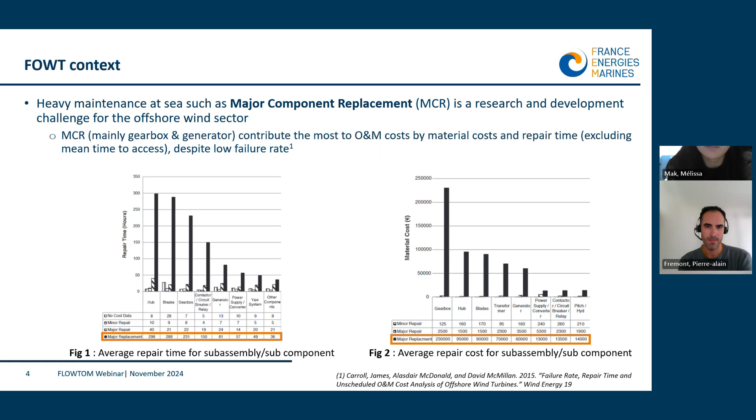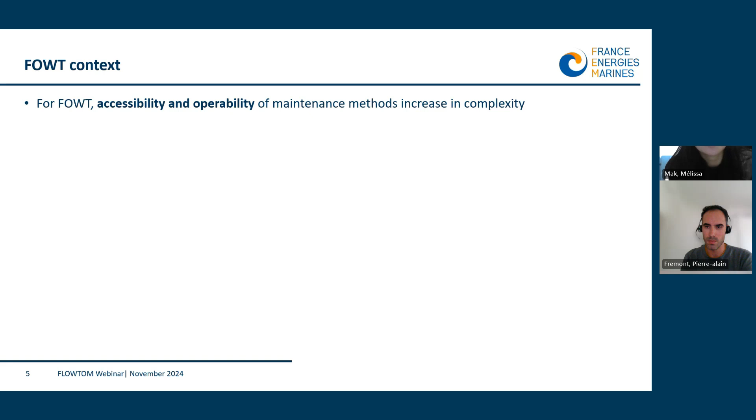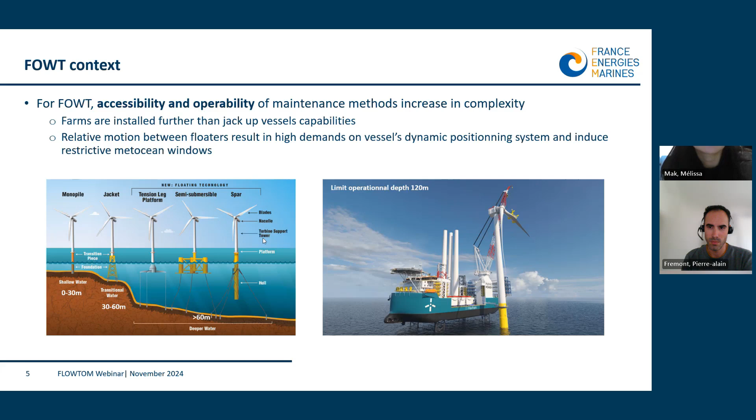And especially in the floating offshore wind sector, accessibility and operability of maintenance methods increase in complexity. First of all, because the farms are installed further than the jackup vessel capabilities, but also because relative motion between floaters results in high demand on vessel dynamic positioning system and induces restrictive metocean windows. So in this context, the sector expressed a need to have reliable and proven solutions for MCR operation of floating offshore wind turbines that are cost competitive with tow-to-port alternatives.

So as you can see on this floating wind JIP phase 3 summary report graph, there are the HLM technologies, among which we have turbine mounted cranes and vessel mounted cranes technology. So there are some technologies that are cost competitive to tow-to-port technology, but as we can also see, they are more sensitive to sea state conditions.

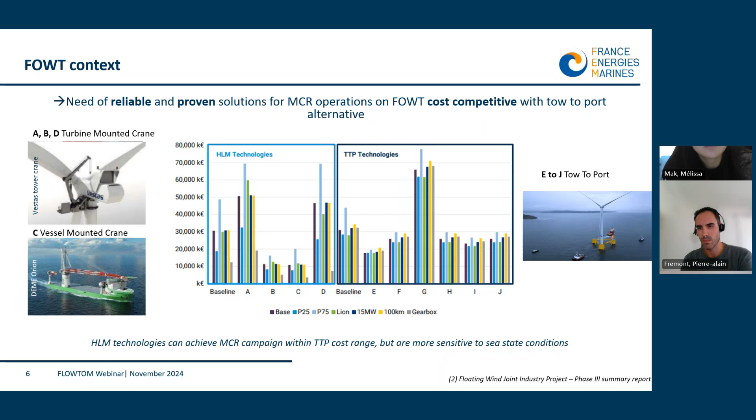So in this context, the FLOWTOM project objective that was carried between 2021 and 2024 is the following. So we challenge floating offshore wind turbine LCOE reduction by improving MCR operation accessibility in different sea state conditions by the development and the assessment of methodology and simulation tools for MCR solution operability evaluation. So you will see in this presentation that through a numerical model that was validated by basin tests, and in which we input operating limits and environmental conditions, we can outcome with time domain computation. We can reach allowable sea states, % of operability, and the favorable period of year for MCR operations.

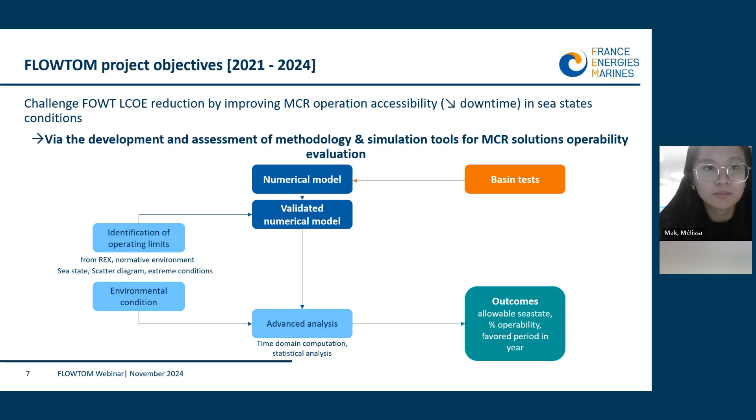So in the following study, we decided to study one MCR solution, which is self-erecting turbine mounted crane. So this solution is advocating improved EHS because there are no relative movements between the floating bodies. It also advocates higher availability, so lower downtime, and it advocates resistance to harsh environment. So in our case study, we describe our MCR solution, which is inspired by the real MCR solution, but it's not the exact real one, because our objective is to crash test the methodology and is not to assess the full system operability.

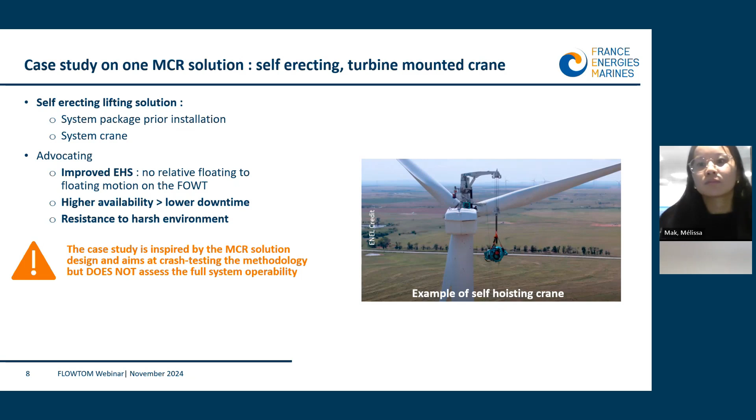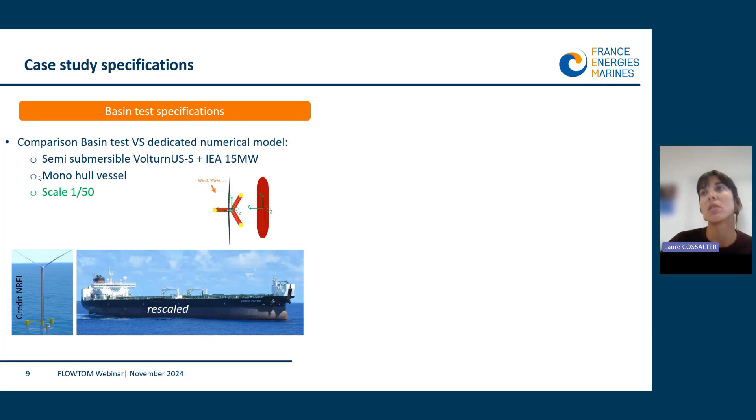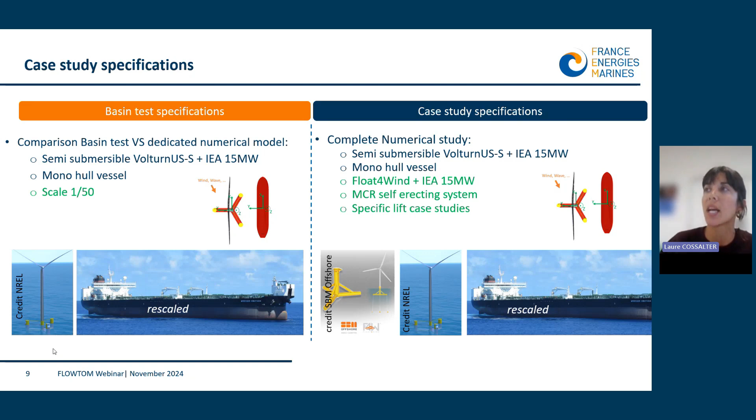So in the rest of the case study specification, for the basin tests, we are studying also a semi-submersible floater, which is the VolturnUS, equipped with a 15 megawatt turbine designed by IEA, and a rescaled monohull vessel, both scaled at 1:50. And for the numerical study, above the two other bodies described, we are also studying the TLP Float4Wind floater equipped with the 15 megawatt turbine, and both floaters equipped with the MCR self-erecting system. And for both cases, we are studying specific lift cases.

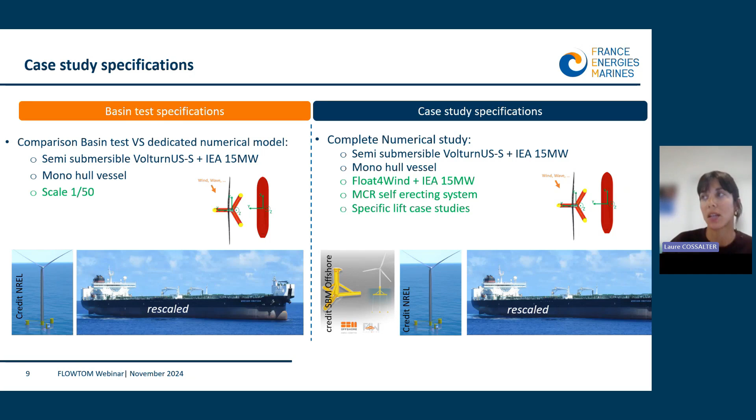So you will now listen to the second part of this presentation. So the basin test for numerical model validation. So first of all, Benoît Auger from Ifremer will specify the wave tank tests. Then Tanguy Kokyo from France Energies Marines will describe the validation of the numerical model. Afterwards, we will have the description of two case studies to study the operability of MCR steps. So first of all, Tanguy Kokyo will describe the methodology developed and the case study specification. Melissa Mack from EDF will describe the case of the transfer of a heavy package from vessel to floating offshore wind turbine. And Pierre-Alain Frémont will describe the hub replacement at the tower top. Then we'll have a Q&A session, and I will conclude and wrap up this meeting.